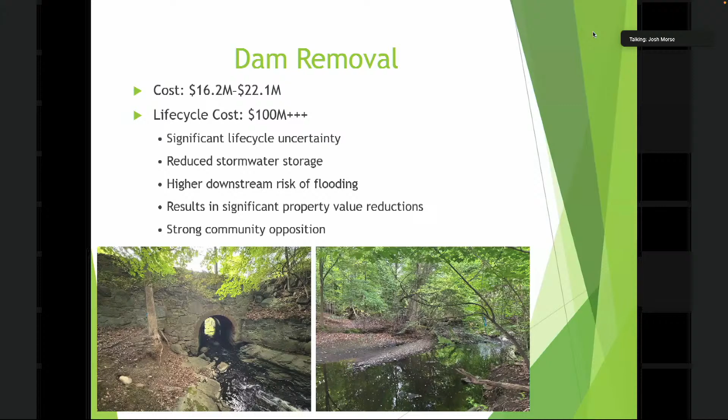The primary difference between this and the Secant Pile Wall Dam is that the Secant Pile Wall Dam goes on the downstream side, so it affords some level of downstream erosion protection, which I'll explain in the slides coming up. It's less expensive, and it ultimately has a better overall structural design from a longevity standpoint.

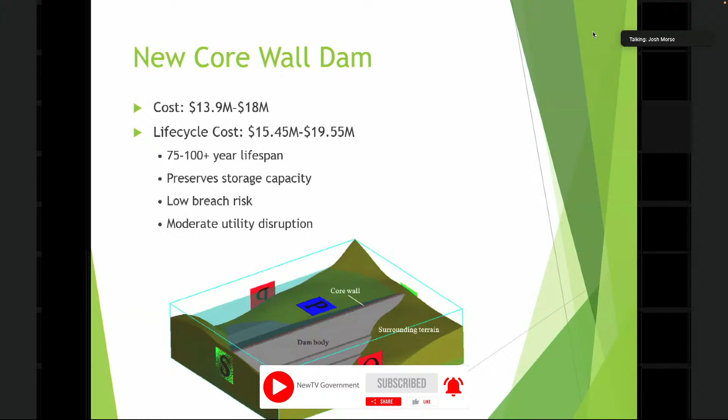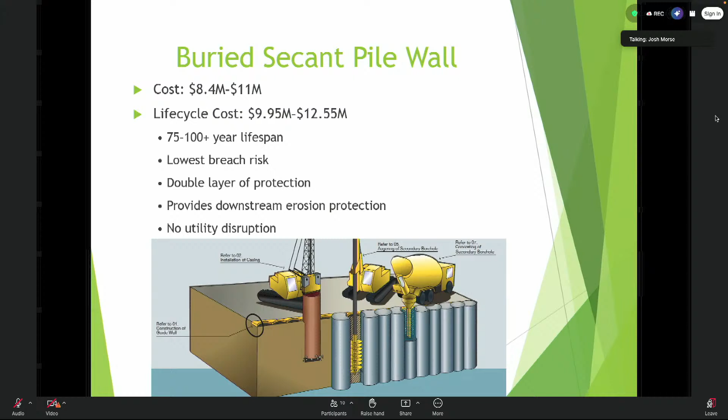The other nice thing about it is it's less intrusive. It's a little easier to install than the core wall, which is reflected in the fact that it has no utility disruption. It's a lot easier to pull off, especially in this application. As I mentioned, it provides some level of downstream erosion protection, which I'll explain in a sec.

What's really interesting to me is that one of the advantages of this is you get a double layer of protection. You have the existing core wall dam that offers your first layer of protection, and then the Secant Pile Wall Dam to the north that offers a second layer of protection.

The other nice thing about this is that you get a level of downstream erosion protection, because you have Dexter Road in between the two that, under most circumstances, would remain intact and stay solid. Both the Secant Pile Wall and the new core wall dam, from a high level standpoint, don't breach—they're very solid. Of course, if flooding is bad enough, water can go out around the edges; that's always possible in any scenario if the water gets high enough. But I wanted to point out this is one of the advantages of the Secant Pile Wall concept, and obviously, as I mentioned before, it's less expensive as well.

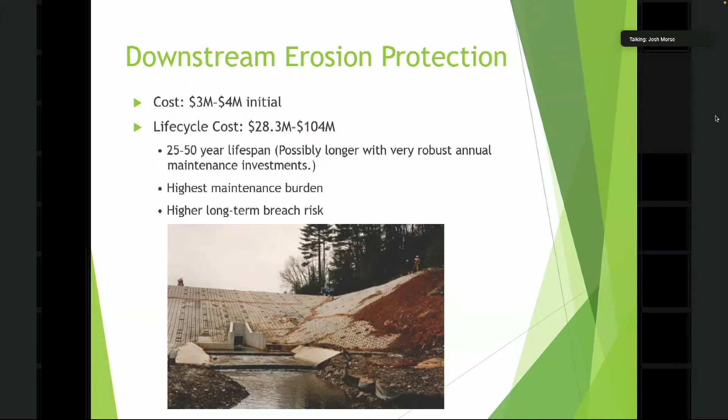I'm going to show you a bunch of different examples here. I do not want to imply at all that these pictures are relative or comparable to Bullough's Pond or Laundry Brook. These are enormous systems, but you'll understand why I showed some of these pictures.

When I started really looking into downstream erosion protection, there are a lot of different ways that this system can fail and has failed. You can get edge and toe scour, which is erosion at the edges, uplift of the articulated concrete block mats, or piping and channeling under the mats, which can cause them to shift and ultimately potentially break free. There's also disintegration of the articulated concrete block over time. I will say on that one, the systems have gotten better, they do last longer than the very first versions, but they still have a lower life expectancy than dam replacement. And then there's settling and shifting of articulated concrete block resulting in increased cable or system pressure.

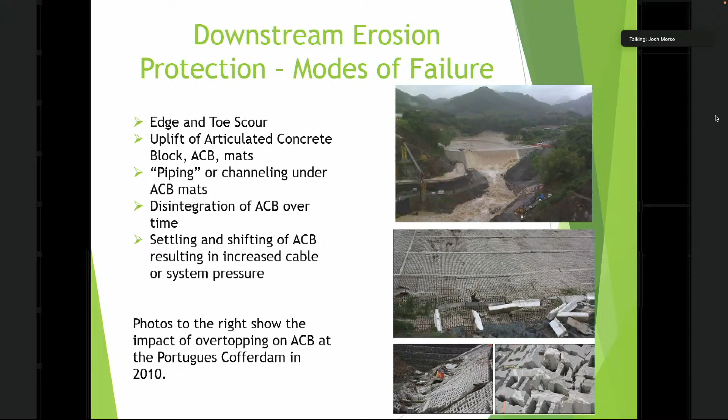I thought this was interesting too, because in some of the after actions I read with respect to articulated concrete block and downstream erosion protection, there were some questions about what happens when you get multiple rain events. In this case, for Bullough's Pond, what would happen if we get multiple overtopping events?

Just for some historical context, in 2024, Hurricane Helene dropped 30.78 inches of rain in Florida. 13 days later, Hurricane Milton dropped another 14.01 inches of rain. Hold on to those values, because you don't need anywhere near that kind of water to experience issues here in Newton. Florida isn't Newton, but the climate is changing, and the potential for back-to-back heavy rainfalls over this next century in Newton is pretty high.

If the first storm degrades the downstream erosion protection system, but the 128-year-old dam holds, the second storm is far more likely to result in a dam breach, as we will not have had time to replace the downstream erosion protection system.

I also found it interesting, and this information is all available online, I'm happy to send it to whoever's interested, that there are roughly 92,000 dams in the United States, and only 0.2% of those rely on articulated concrete block downstream erosion protection systems. 75% of those articulated concrete block systems have been installed since 2000. So there's limited information on the life expectancy for these relatively novel systems. I think that's a really important consideration. When we're trying to nail down how long this lasts, it's very hard.

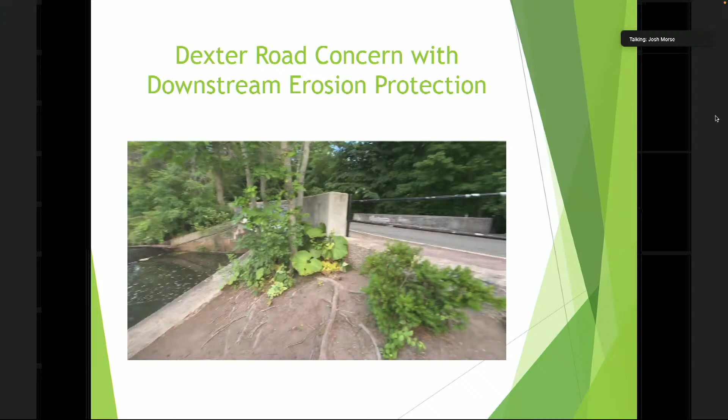Which you'll see in a minute—we could start getting water under Dexter Road. Dexter Road can fail, the piping starts to get underneath your downstream erosion protection, and then we're in trouble.

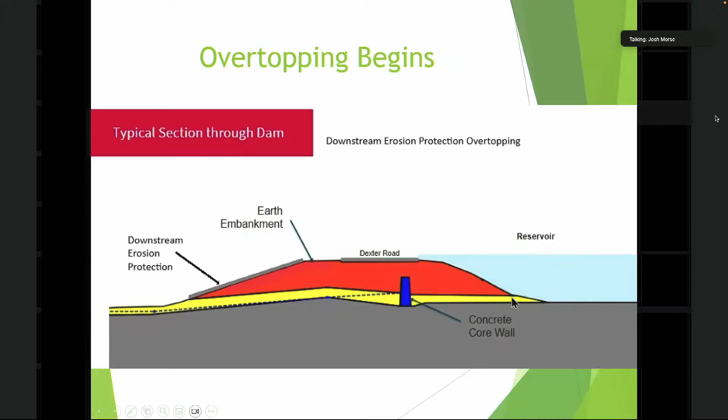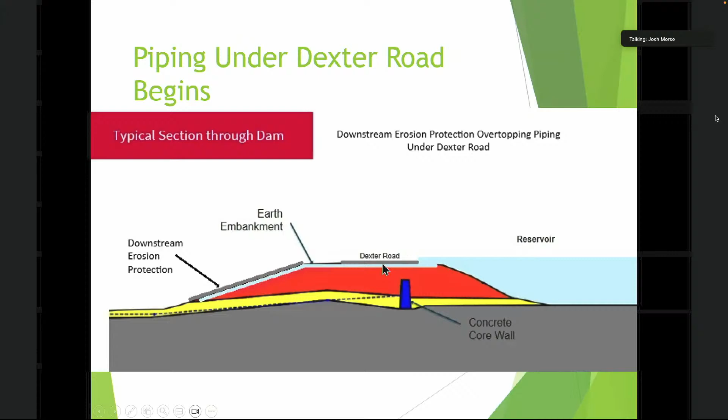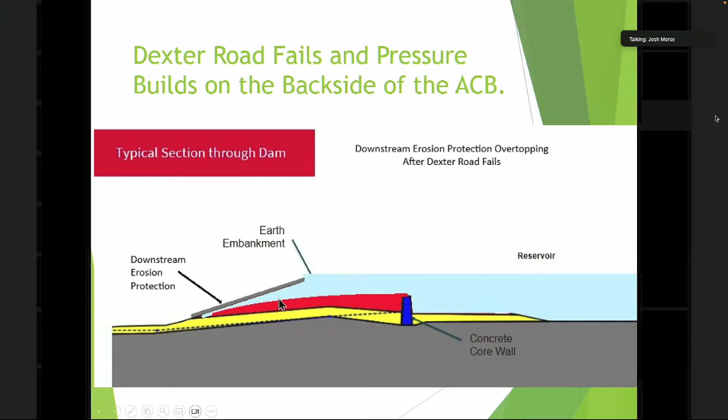So just to walk you through this: water level rises, you start to see overtopping of Dexter Road. This is that piping or channeling I was talking about, where water starts sneaking in underneath Dexter Road and getting on the backside of downstream erosion protection. Dexter Road ultimately fails, water pressure increases on the backside of downstream erosion protection, and then ultimately, if that protection lets go—which, with head pressure on the backside, would be likely—you have a much higher increased risk of breach of the existing core wall dam.

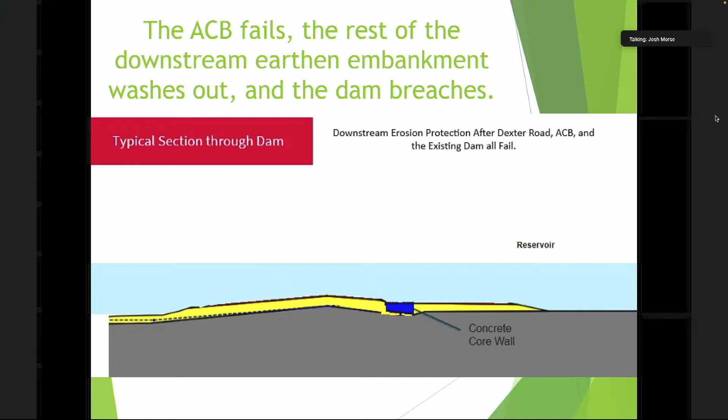This can happen, and I think this is another interesting point. Over the last 7 years, there was a lot of focus on your 24-hour storms. What we're seeing all over the place is that yes, those are something we should plan for, absolutely, but we're seeing a lot more of these short burst storms that are overwhelming our systems that are not over a 24-hour period—you're seeing 2, 3, 4, sometimes more inches of rain over a few hours, and that can be very problematic.

This was 2023 in Hillsboro, New Hampshire. They received 2 to 4 inches of rain in an 8-hour period, which is not a tremendous amount. This is on East Washington Road—anybody who wants to go do a street view can take a look at this. This was a tiny little brook, so this is not much, but it just shows what Mother Nature is ultimately capable of.

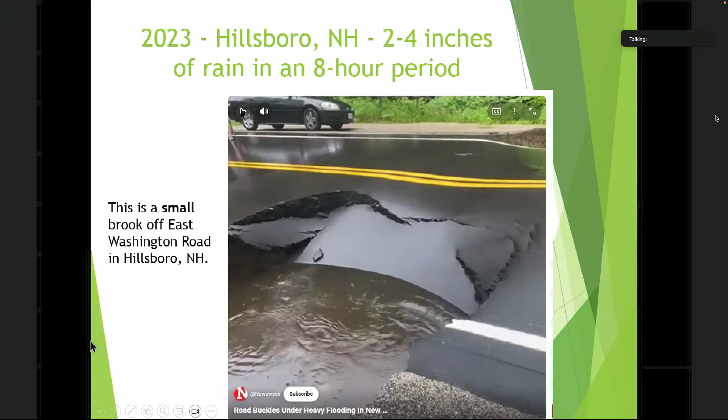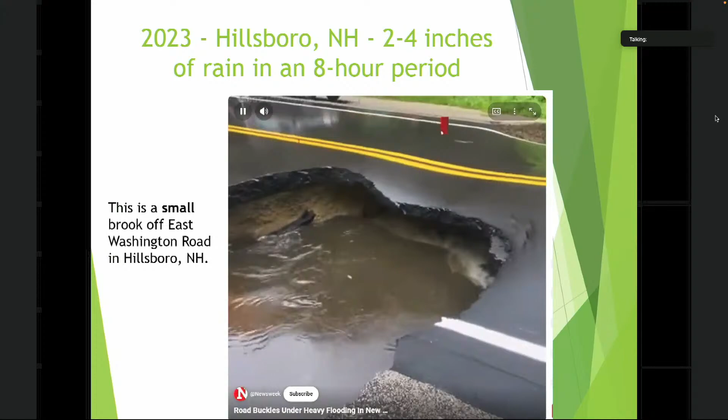What you couldn't hear there was a bunch of people laughing. I'm not sure why, but ultimately that just shows you that a relatively small brook with a fairly modest amount of rain can be very damaging to a roadway, much like Dexter Road.

So what do downstream erosion protection systems and airbags have in common? Airbags help limit injuries in a car accident. Downstream erosion protection systems help limit downstream erosion and reduce the likelihood of a dam breach. Even better than an airbag is to avoid the car accident altogether. Replacing the dam instead of installing downstream erosion protection is like avoiding the car accident and not needing the airbag. Replacing the dam with a new secant pile wall dam is like avoiding the car accident and having an airbag, because you get some level of downstream erosion protection plus that double layer of protection.

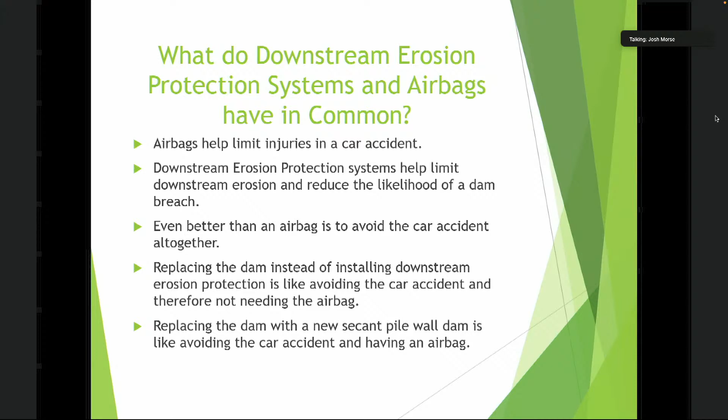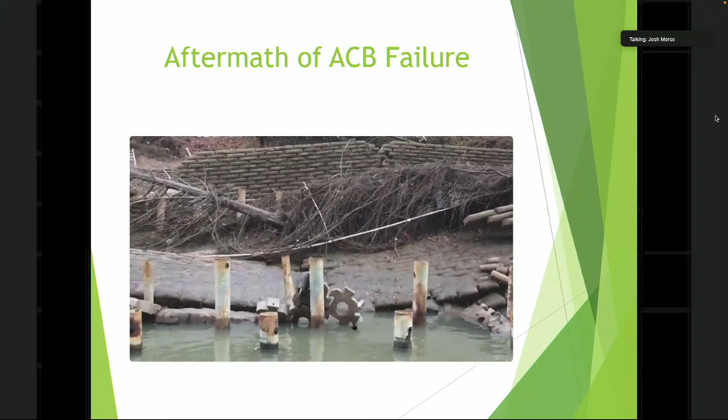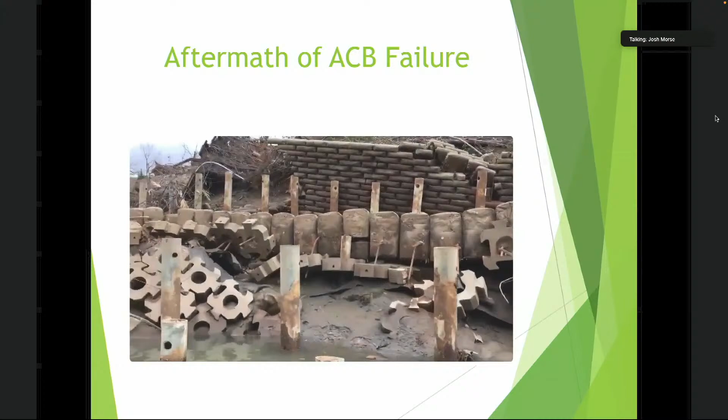This is another video of what can happen with articulated concrete block, even with cable reinforcement. I'm just going to play this - if you look close, you can see some of the cables and supporting systems. Ultimately, if you get water that gets underneath those mats, it's game over. The reason I wanted to show this is, thinking about Dexter Road, if we get water underneath those mats, we could be looking at a situation just like this.

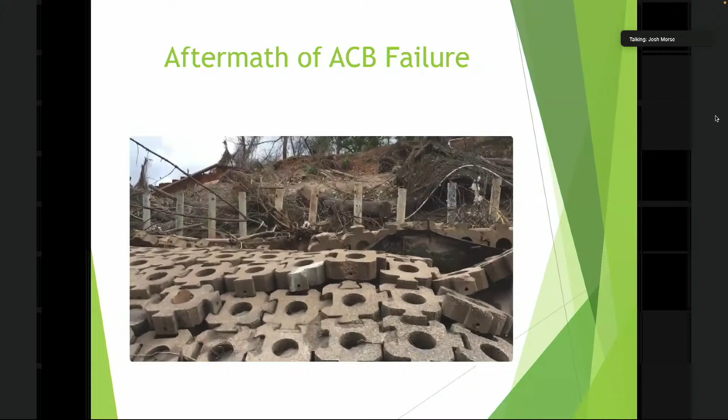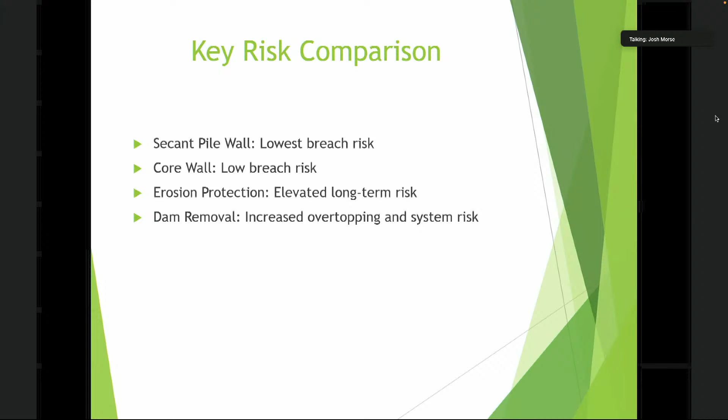So key risk comparisons: the secant pile wall has the lowest breach risk. Core wall has a low breach risk. Erosion protection has elevated long-term risk, and dam removal means increased overtopping and system risk.

Financial comparison: lowest life cycle cost is the buried secant pile wall. Moderate life cycle cost was the core wall. Highest life cycle cost was erosion protection and dam removal. 100-year life cycle cost for dam removal is $200 million plus - I'll explain why in a sec. New core wall dam, and I've already read these numbers, but that's what we're ultimately looking at there.

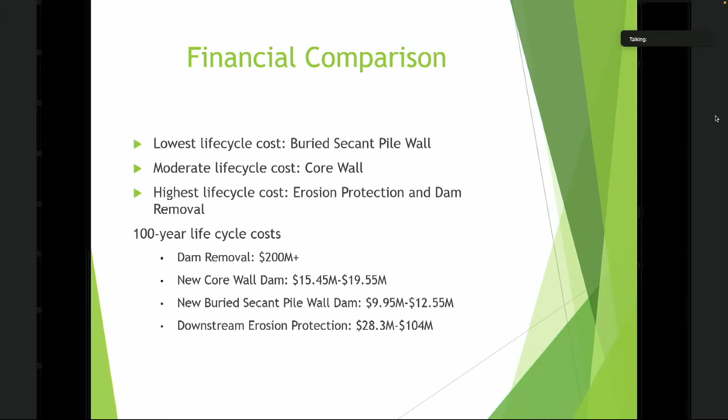So conclusions: based on the criteria matrix, the buried secant pile wall alternative received the highest overall score and combines the lowest estimated construction costs with the strongest long-term risk profile. This option was overwhelmingly supported by the working group, the consultant, the city engineer, and the Commissioner of Public Works. It has also been supported by the overwhelming majority of residents who have expressed their opinion on the Bullough's Pond Dam project to date.

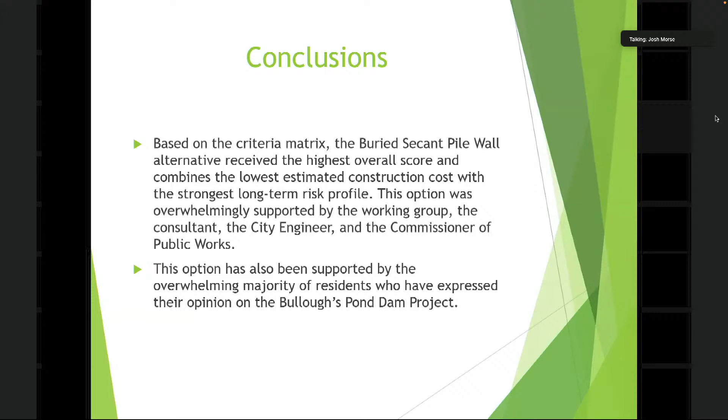And also, I think the biggest one for dam removal for me was that the modeling shows an increased amount of flooding in the downstream neighborhoods in those 25-year-and-under storms.

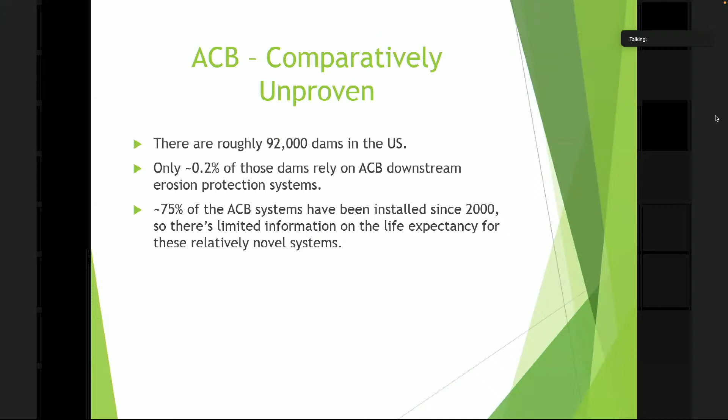We were actually talking about this in the working group today. Again, I'm no dam engineer, but I think we can absolutely increase the top of the secant pile wall. I don't know how close you can bring that up to Dexter Road, because from a structural standpoint you wouldn't want the dam too close, since you want some buffer with traffic going over the top of it. That's something we'd have to ask the engineers to look at.

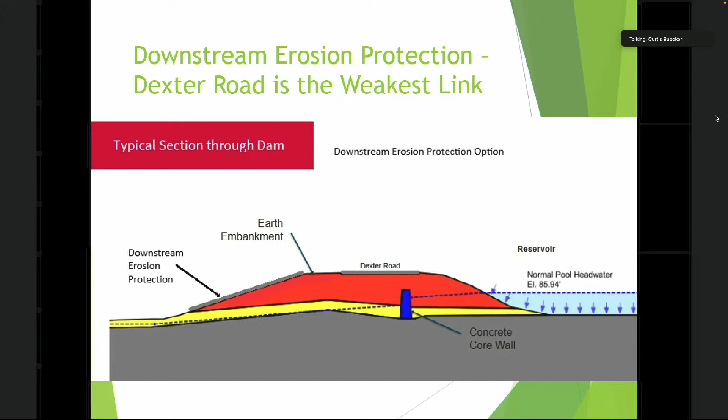I'm just thinking mathematically, there could be a calculation so you'd understand, you know, they talk about the 100-year storm, the 250-year storm, and the height would be proportional or placed so that a 500-year storm would never breach that secant wall, correct? That's based on a whole bunch of other conditions, but I'm just thinking that height is pretty critical.

It is critical, and it's a really good point, and I think we should study it. Personally I think we should raise the top of dam height. But if we start talking about 500-year storms and insane amounts of water, bear in mind that you're going to flood all of Dexter Road and Walnut — it's going to be cascading left and right of the dam. So it's great to raise it for a variety of reasons, but in those very extreme situations...

The dam won't breach and you'll be retaining a lot of water in Bullough's Pond, which is good for all the folks downstream. But the water, when it ultimately gets to that level, is going to be left and right — you're going to have water everywhere.

That's the other question I was having, because we don't have this image in our backup material — this is new for me, first time I'm seeing it. So I was trying to understand the relationship of this wall to the existing dam, because I was terrified of seeing the water overspilling on the sides of the existing dam, and then getting underneath the interlocking block thing, you know, washing it out from underneath and floating away.

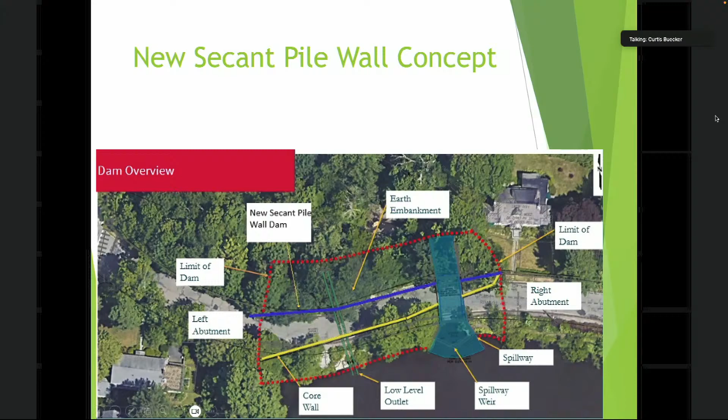And that leads to my next thought, which is about all of the infrastructure downstream that needs to be improved. I just feel like we're solving this immediate problem, but we've got a huge downstream issue — the whole culvert and getting to Watertown really needs investment. It's under capacity right now, and we need to think about that too. It's not for now, and it's not for you, but it's something that really concerns me, because we need to think that through.

Well, it's like you served this right up for me. One of the things I mentioned to the community is that we have a team of folks working on our comprehensive stormwater investment and maintenance program. That kicked off a little while back this year, and I think we're on track to complete it by the end of 2027, which is a ways out.

There will be progress along the way, but we absolutely recognize that we need to do better with respect to maintenance, and we need to invest more with respect to capital. Stormwater systems, it is true. I'd encourage anybody who has the opportunity to take a look at the updated flood maps for Newton, and look at all of Newton, not just one location. In those extreme events, Newton is very low lying. We have a lot of bodies of water, a lot of buried bodies of water. It's impactful. We have a lot of work to do. We're not alone—there are a lot of communities faced with the same challenges across the country, but we recognize we have work to do, and we're working on it.

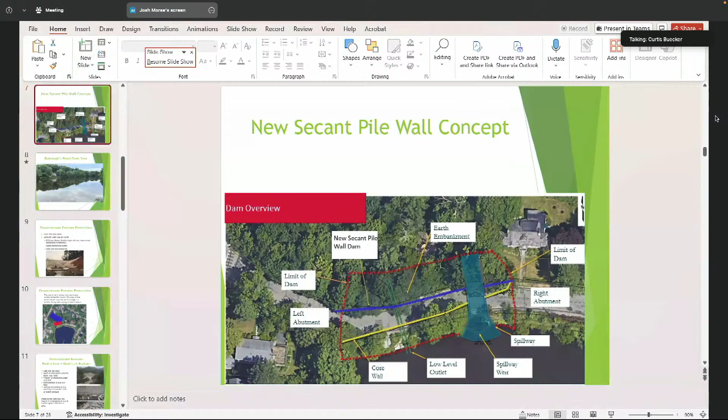Can you explain, just try, how logistically that is done? Like, how do you actually open up a vertical plane in the earth to get a wall down there? I mean, I can see this picture, but I'm having a hard time visualizing it—do you open it up and get these drilling things, the same way they get bridge supports into the ground, they just force them in? So what ends up happening is—I'm going to use non-construction terms—they use a very large cylinder and drill a very large wide hole into the ground. They pour concrete into it, let that cure, then remove the cylinder. They do that again and again, and you'll notice every other one has a slightly different design. This creates that interlocking design of the secant pile wall dam. Ultimately, that's how they create it. Does that help? Yes. How long does it take to build such a thing?

I don't know, it's a good question. I would imagine a lot of it depends on the length of the dam. And I should say, the exact length of the dam is something we'll be studying in the design phase as well. I don't want anybody thinking my sketch nails that down completely at this stage—we need to take a hard look at that.

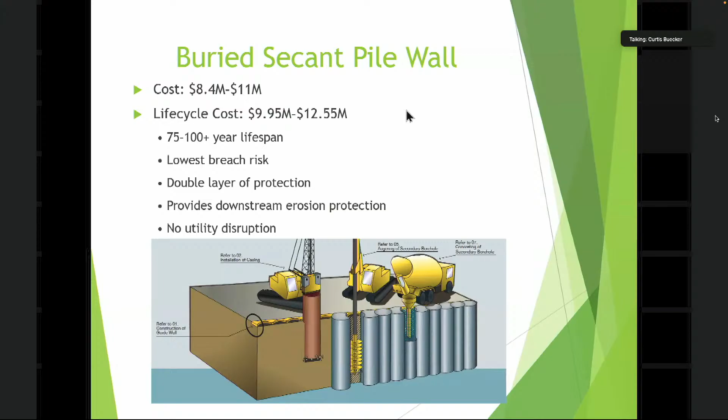Okay, and to my colleague's point about this being in the lifespan of this conversation about what to do—in this sort of modern time with the dam, where did this idea come from, the buried secant wall? So this was actually raised by some community members, a few residents in Newton who are dam engineers. They ultimately recommended we take a look at this. I asked GEI to do it, and I started looking into it as well. GEI then put it on the list and added it to the conversation, and ultimately it went from there.

That's really interesting, and I really appreciate knowing that. I've long felt that the expertise we have in our community is such a special feature and kind of privilege that we have in Newton. So I think that's a notable thing.

I suppose my last question, also to Councillor Getz's point—what had stood out for me from the last meeting I remember attending, maybe a committee of the whole or something, was the articulated blocks, I remember that image. And then I remember those really scary maps of the flooding effects, thinking, oh my, no matter what we do, someday a day is going to come where we have these catastrophic effects to the city and people and property.

As this is getting closer to the end of the process, could we have a little bit of an update about what this looks like versus the last time we had that conversation? I seem to recall that big scary flooding scenario being presented at the same time as that was articulated. So I'd like to know, what does this do to that prior discussion?